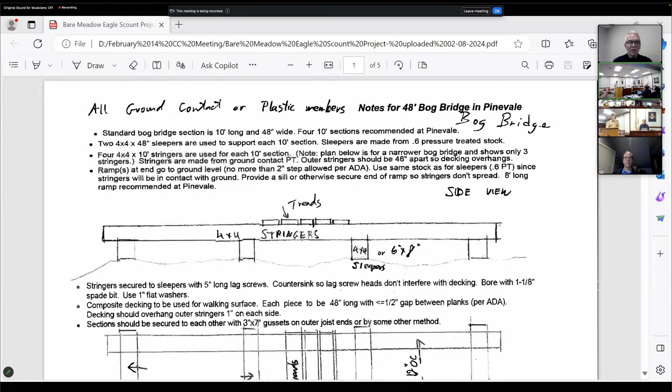I believe that you said that this is a continuation of somebody else's boardwalk, so we're gonna have to get all the sections in that area replaced by this time? So I wouldn't call it a continuation, it is a completely separate bridge. However, it is in the same area and the same process it's gonna be built with.

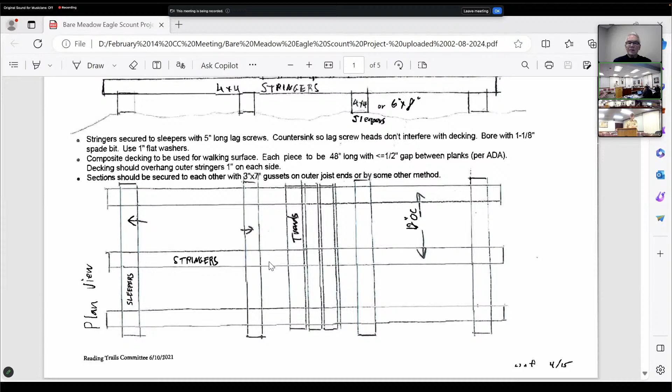If you want to pull up this paper - this is basically what my bridge design is gonna be, you'll see it up there. It's gonna be built out of 4x4 sleepers and 4x4 stringers, and then we'll have the required treads for stepping. And if you want to take a look at the 7-foot section, and the picture of the bog, if you want to pull up the long one.

You'll see in the middle there, that there's a healthy living bog right there. So how I'm gonna work around that is by putting in a separate 7-foot section that will have one end of the sleeper removed, that'll allow the wood to lay directly on it. And as you'll see in the picture, there's a large slant where it hits the bog, so that's what we're hoping to minimize by removing one of the sleepers in that section.

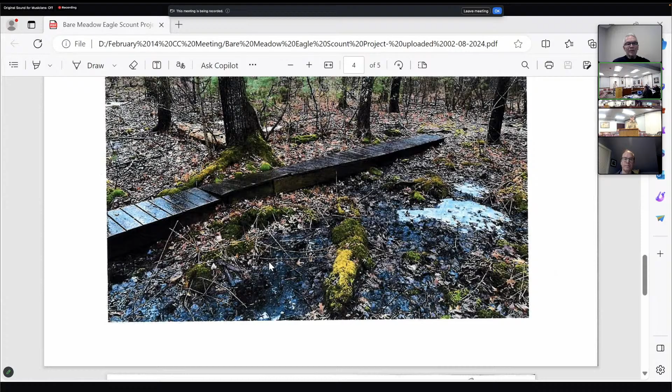So on the screen is basically an outline of what it looks like. You'll see the 10-foot, 7-foot, and 10-foot sections, with 2.5-foot ramps on the ends. That'll make it 32 feet in total.

You'll see my design for the ramp. It's very simple—we're just going to put 2x8s together, making it a 4x8, and then cut it down to the correct angle so we have a nice, not too steep incline going onto the bridge to make it ADA accessible.

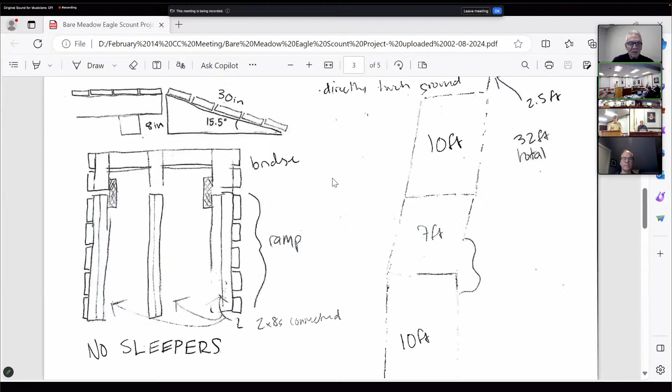Is that it? I'm kind of expecting some questions. Are there members of the commission that have questions for Jack? Hi, Jack.

My first question is, how long do you expect this build to take? This build is really going to be done over two separate days. There'll be a short day of cutting the wood to the correct length.

I'm basically going to be buying a bunch of 10-foot 4x4s and 8-foot 4x4s, with some exceptions for the ramps. That'll all be cut on its own at a Scout Dad's shop or someone's driveway, depending on if we have the right tools. Then all the assembly will be done in the forest. It shouldn't take too long—it's a lot of simple stuff, lining it up and drilling it in.

Are you going to leave the materials there before you build it? Well, I'm probably going to store it at my house or something. So it's not going to be at the site? No, nothing's going to be at the site. Nothing's going to be in the forest until the day we build, when we'll transport it all in.

And what are you going to do with the material you're taking out? The bridge that's there is going to be ripped out, carried out, and disposed of in a dumpster we have access to through one of the Scout Dads. None of that wood will be reused—it's really old, rotted, slippery, and pretty much just very unsafe.

And I'll say, not on you, because on previous projects the material isn't always carried out immediately. So I'd like you to make sure that happens. Yeah, it will.

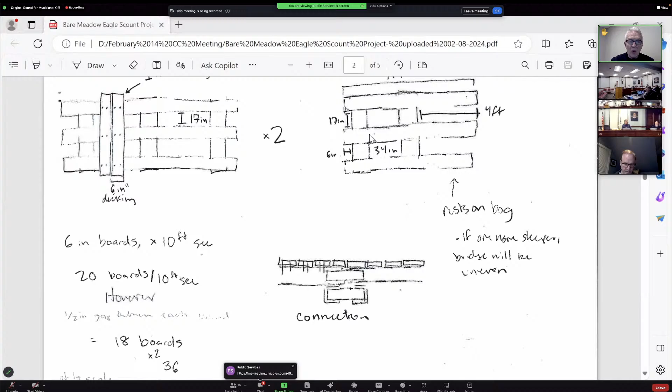Anybody else? Walter has his hand up. Yes, thank you for the presentation. Can we go to the picture which shows the little ramp going up to the work you're going to do? Yes, okay.

Mechanically speaking, you're tapering that ramp off to zero on the right-hand side, which is going to weaken it. Unless that's the standard procedure for bridges in Reading, may I recommend that last right-hand piece not be installed—instead have it cut, so you end up with a trapezoid instead of a triangle.

Does that make sense? Yeah, I understand. All these drawings—this is a very basic proposal outline. I've yet to get the exact science of the measurements and everything like that, but this is my general idea. We're thinking about just burying one end instead of having a ramp, because it could make it easier and cause a lot less trouble than building a ramp.

It'll of course take into consideration the 2 inches that's needed per ADA. But everything you see here is very general—these are the first measurements I came up with.

Jack, let me say thank you on behalf of people in Reading for doing your volunteer work, and I hope you keep that up for the rest of your life. On a personal note, next month will mark my 60th year of being an Eagle, and it's really come in very beneficial all my life. So good luck to you. Thank you very much, I appreciate that a lot.

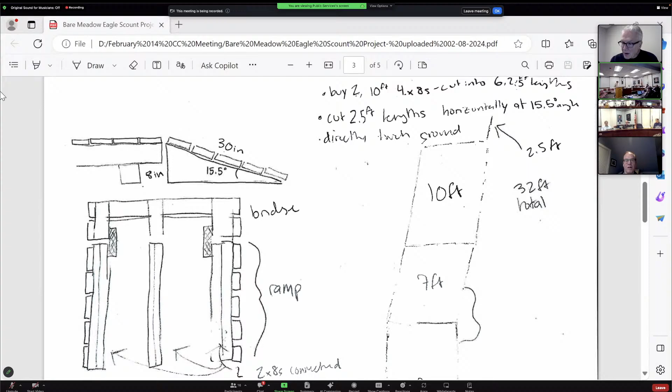So when do you plan on removing the old one, before or after? I'm asking because I think if you leave it there, you can move it off to the side, you might be able to use that to stand on so you're not stepping on the bog.

Well, so it's like a staging area and the building thing, you could use that to stage your materials, lay them on top, stand on it if you need to. And then once you finish the project, remove the old ramp after you're done, would be my suggestion. Okay, yeah, you have to see how it makes sense for you. My answer to you would be, what would you recommend?

Yeah, definitely, I don't know how the other commissioners think about it, but I will execute that.

My question was just, which trail are you gonna take to get into the forest? Where are you gonna be bringing your truck with your lumber in it? It'll be the Wood End Cemetery, there's the drive around out back, that's where all the cars will be that we need, and then we'll just carry it down the hill.

I understand there's a slippery slope there. As a troop, we do have a wagon, so we could use it to bring stuff into the forest as we need, but it really depends. I presume you will leave the wagon on dry ground and not drag it through the mud.

That's what the old bridge could be used for. We'll take part of the section and station the wagon there and work out of that, or we can leave it on the dry trail that's there.

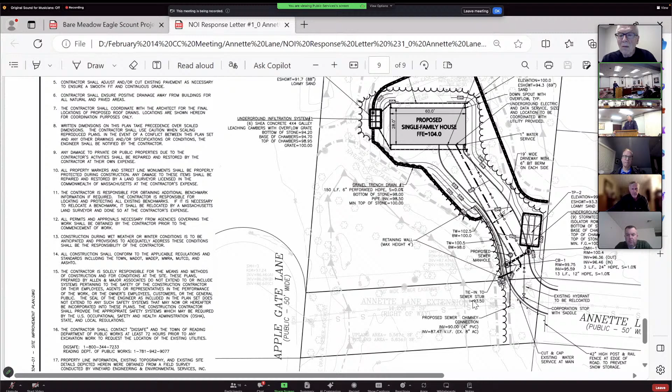And sorry to make you jump around, Chuck, but if you go back up to our proposed site plan. Just let me know if that's right. One more up, please. Thank you.

We added a 42-inch high post and rail fence at the end of the existing pavement of Annette Lane, and had it wrap up along the edge of the driveway. This was to prevent snow from being pushed towards the wetland when the road or driveway is plowed.

In association with that, we removed the proposed snow storage and pre-treatment areas that we had previously shown at the end of the 30-foot roadway extension.

We extended the boardwalk to meet the existing pavement at Annette Lane and at Apple Gate Lane. So the boardwalk is now 200 feet long, but it's important to note that it's the same distance within the wetland, which was 92.4 feet.

We had played around with moving the boardwalk further south to try and get it to match up with the end of the existing sidewalk on the southern side of Annette Lane. But if we were to do that, it would require removal of 6 trees, including a large oak near the corner with 10 Annette Lane. The boardwalk as we're proposing it only requires removal of 2 trees to construct it.

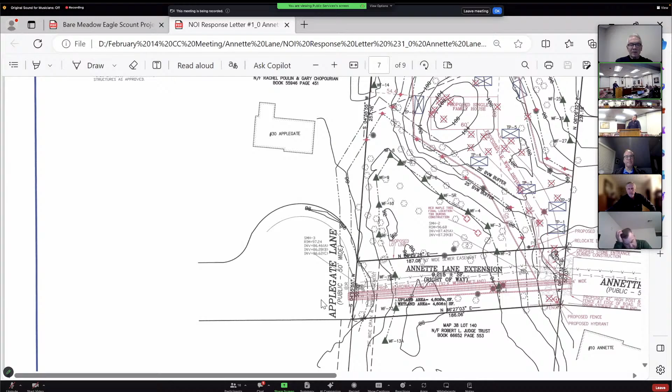We placed red X's over the trees proposed to be removed. With this new driveway and road configuration, we reduced the number of trees to be removed from 32 down to 26. We also submitted a proposed planting plan.

Chuck, if you want to go down one, if we have a moment. So we submitted a proposed planting plan, and this plan outlines locations, types, and number of proposed trees and shrubs that can be planted to make up for these trees that need to be removed.

As we mentioned in a previous meeting, the applicant is open to making a donation to the Conservation Commission Fund in lieu of replanting some or all of the trees, if the commission is acceptable to that. And finally, Lucas Environmental also prepared a letter discussing how this project meets the applicable performance standards in the Wetlands Protection Act and the Reading bylaws.

Lucas Environmental also submitted a request for a variance for construction of the boardwalk within the 25-foot no-disturb zone and within the wetland, and also a variance for construction of a portion of the retaining wall and driveway within the 35-foot no-structure setback. With that, I'd like to turn it over to Joe Orzel of Lucas Environmental to discuss those items in more depth.

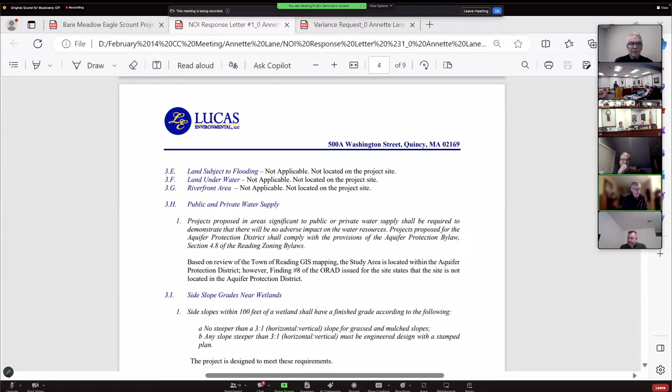As far as wildlife habitat, as stated in the regulations, the town accepts and adopts the current requirements and performance standards under the Wetlands Protection Act. Under the Wetlands Protection Act, the buffer zone itself, wildlife habitat is not within the buffer zone itself, is not protected. Again, it's wildlife habitat within the resource area that is protected.

That said, we are proposing replanting vegetation within the 25-foot no disturb zone according to the Reading planting replacement schedule. The site plan that shows the plantings has them located in 3 general areas. And these are based on a site inspection that I conducted to try and evaluate where the existing shrub layer could accommodate additional plantings where it wasn't too dense, and also where the tree canopy was not extremely dense.

The species that are proposed are primarily shade tolerant, so even with the shady conditions, they should be able to survive. And they are also other species which are already present on site for the most part.

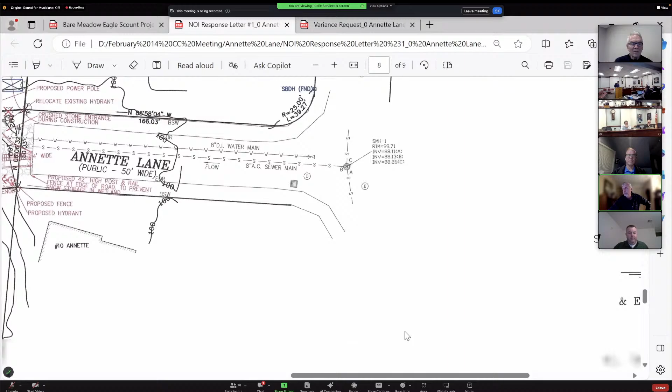The planting plan that was proposed included 16 trees. Let's see my notes here, hold on a second please. 16 trees, including 1 white pine, 5 red oak, 5 yellow birch, 3 American hop hornbeam, and 2 red maple.

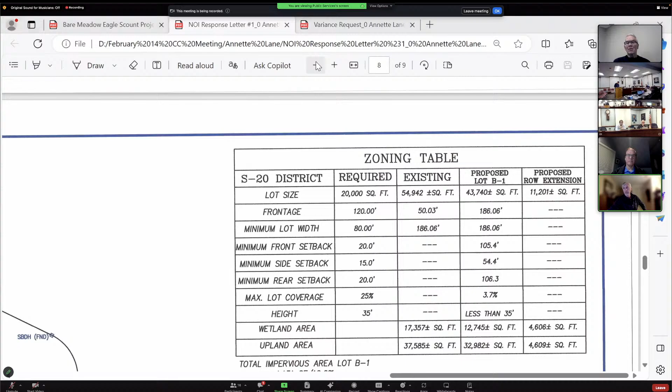10 small trees, large shrubs, those being shad bush. And then we had proposed 33 shrubs split up between witch hazel, sweet pepper bush, and maple leaf viburnums.

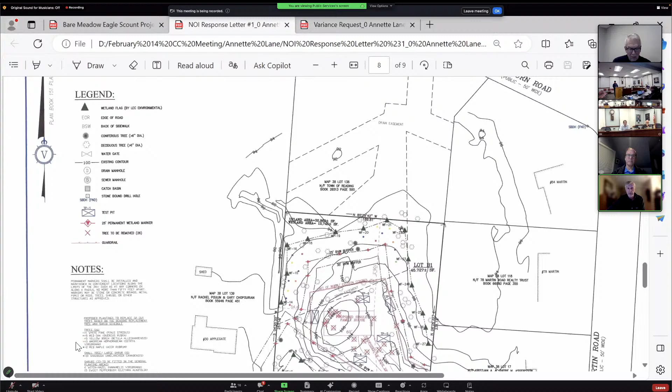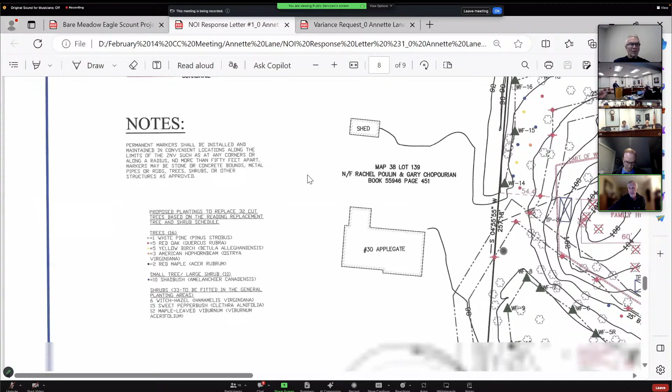As Andrew had noted, the actual tree count, trees being cut, was subsequently reduced from 32 to 26, which would allow the number of shrubs to be reduced by about 15 shrubs to meet the tree replacement schedule, but at this point we're not proposing any changes to the planting plan. And if the commission agrees to this plan, there'd be an overplanting above and beyond what would be required under the tree replacement schedule.

We did also submit the variance request, and I think Andrew kind of touched on all those items already.

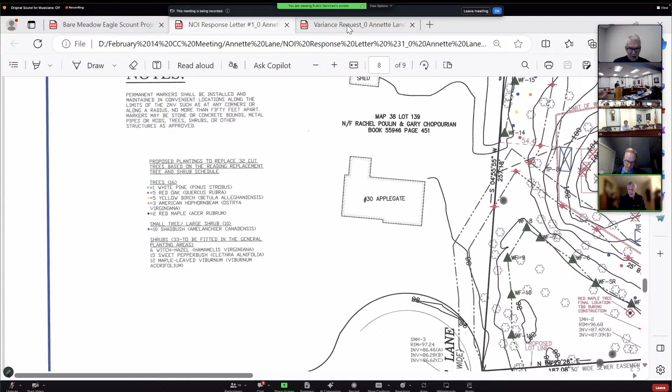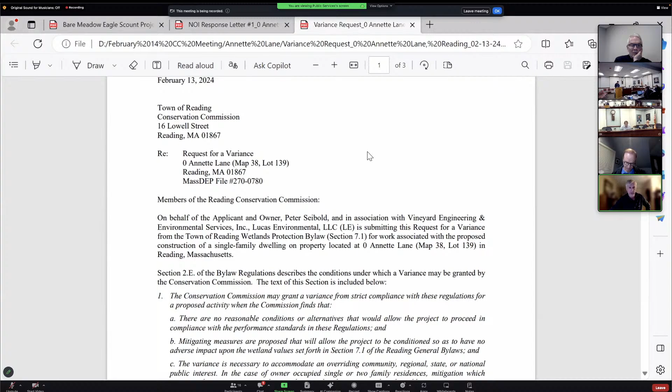As far as why the driveway is required to be slightly within the 35-foot, and why the retaining wall is required to be within the outer edge of the 35-foot zone, I should note that at its closest, the wall is about 31 feet from the wetland, so it's not like a very large intrusion into the 35-foot zone. Also, as an alternative, doing grading in that area instead of a wall would require grading down into the 25-foot no disturb zone, which would be more of an impact.

So I think we meet the requirements for the variance on those items, and I also believe that we meet all the performance standards under the bylaw regulations for work within the buffer zone. Now, if the commission has any specific questions, I'd be happy to address those.

Any members of the commission? Bill?

Yes, there appears to be, unless I'm misreading it, a misprint on page 2 based on what you just said. Page 2, excuse me, second to last paragraph, it says retaining wall is located... Oh, I see now. Got it. That's fine, I now see this text is consistent with what you just said.

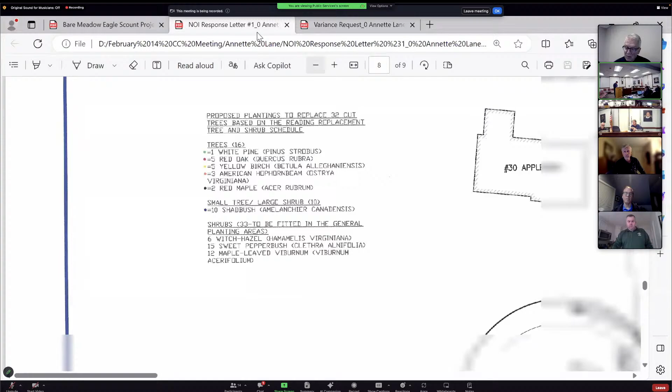My next question was, I don't see any sort of diagram on the plans I'm looking at today that shows how you're going to protect the construction entrance from bringing mud from the hillside out onto Annette Lane. I presume you're coming and going up and down what will eventually be the driveway.

Yep, so we have shown on our site plan a crushed stone entrance during construction. Good, okay. It's kind of faint, a little hard to see, but it basically goes at the end of Annette Lane, the end of the pavement of that lane, and will extend up into the driveway. On the same plan that has the plants on it?

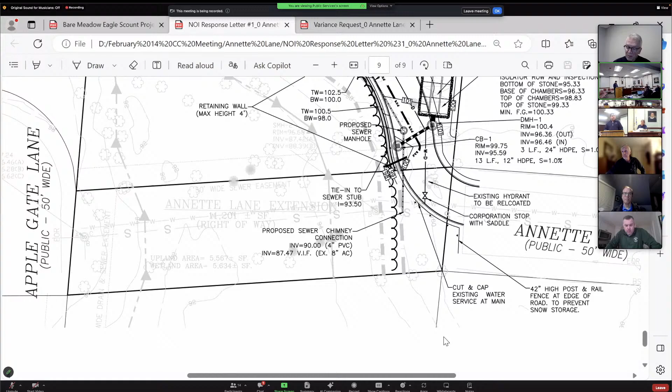No, on the site plan, the plan before that. Maybe I only have these two and not that one. Okay, but as long as you've got it, go up to the first plan in the set, Chuck.

Is that crushed stone permanent or temporary? No, it'll be removed after construction. The red note right above Annette Lane, and then it's hard to see, but there's some faint text up to the left, on your right, Chuck. Yeah, it says crushed stone entrance during construction.

I see that here, and then in gray we have something that looks like a hatch. Okay, oh yeah, and this can be extended a little bit into the driveway. But yeah, this will be crushed stone during construction, removed following construction.

And after you remove the crushed stone, will you put down topsoil again? Yeah, part of it will be driveway, so this is going to be driveway here. And then this was kind of when we had the 30-foot roadway extension, so probably wouldn't need to extend out this far. But in this general vicinity, most of it will be driveway, and we'll replace whatever we have to with topsoil.

Is there a detail on the construction entrance so we know how deep it will be placed? Is it 12 inches, 16 inches? Provide one - do you have a general standard detail that you guys use or like to see?

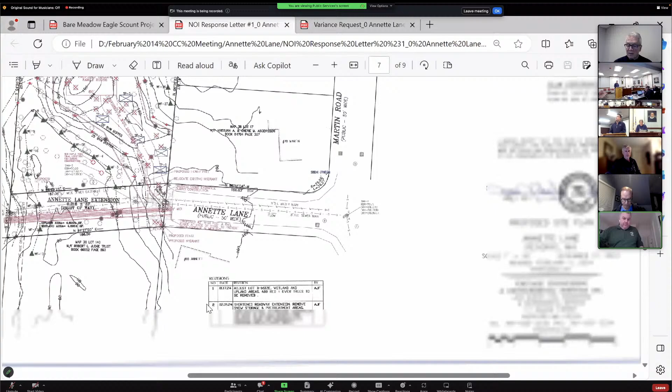I am going to defer to Carlton Quinn, with Civil Engineering, who's on the call to answer that question. So Carlton, my question about that really is, I know there are a lot of boulders up there at the top of that hill - how are you going to manage them? Are you bringing in large construction vehicles to deal with those boulders?

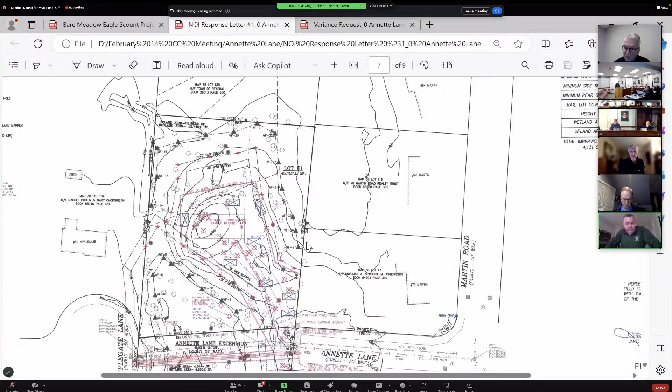Yeah, we would generally handle it with larger construction equipment. If there was something we couldn't handle, we'd have to hammer it down into smaller pieces so we could excavate and remove it. Generally that would be a pneumatic hammer that attaches to the arm of an excavator that would be there to excavate for the foundation anyway. So it would really just be swapping the bucket out for a pneumatic hammer - it wouldn't likely be an extra piece of equipment, just the equipment we already have on site. Okay, all right.

And I did get an email from one of the neighbors talking about the boardwalk, and there are people who said they don't really think they need to build it. So I went and walked that path between the end of Colburn and the end of Deborah, and I also looked at it on the GIS. The neighbor to the north of this property is actually the town of Reading, and we own part of that path that comes in from Colburn, but it's private property on the far end. So even though the neighbors on the Deborah Drive end have landscaped very nicely to guide people to the part of their yard they're willing to have people walk on, that is not a protected right-of-way in any way.

So I do think it will be a public benefit to have a public right-of-way in the form of the boardwalk. It's not a protected passageway further up, and the two neighbors on either side could easily put up tall chain link fences, and therefore there would no longer be a path up there. So I would propose that we keep the boardwalk in the plan.

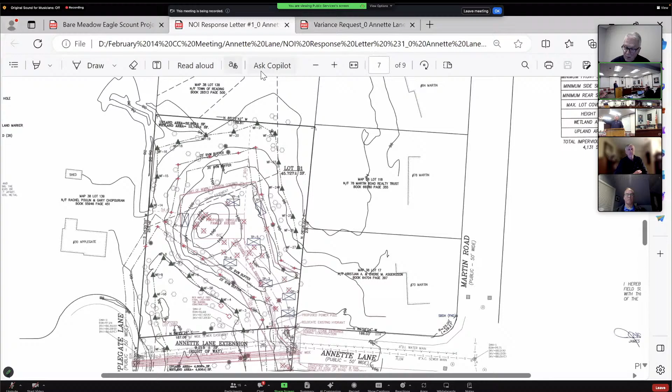Well, the trees that have the red X on them are located by instrument survey, so that's where they are. And then in consultation with Lucas Environmental, that's how we came up with the locations for the proposed planting plants and the species that would go in those locations. Lucas has done a couple site walks out there, so it's more than an educated guess as to where they would go. It's not like we just threw dots on a plan.

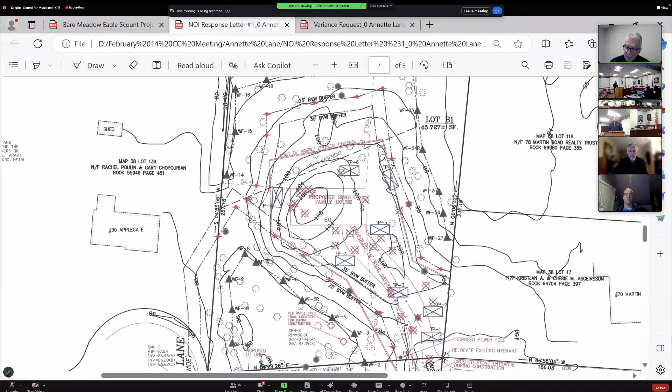Yeah, so I just want to see it. I want to be able to walk the site and see, okay, this is where the tree's going to go. But you're saying I could do that with the plan? Yeah, you can scale it off. Through the chair, yes, go ahead.

And as was mentioned, the plant isn't necessarily going to go exactly where the dot is. They're approximate areas as far as the general locations that are suitable for planting, and they're spaced appropriately on the planting plan. But when you're out in the field, you could certainly meet with Chuck, or the landscaper could meet with Chuck to locate the best location for each of those plants within those areas.

I guess I'm asking because I'm worried that it's nice on paper, but when you get there, it's not really reasonable. Well, it is reasonable. I've been out to the site and I looked for areas where plantings could be done. And there are locations out there where I wouldn't recommend putting any plants in, but these general areas have minimal shrub cover, and the tree canopy is fairly open. So they're amenable to doing some plantings.

I would love to walk with you at the site to see where you plan on putting the trees. So do you want to be in on it, like when I said have Chuck go, do you want to also go at that time? This is before we approve. Okay, so you want to walk it now? So I guess that's my request to you. I would love to walk it and get a feel for where these trees are gonna go.

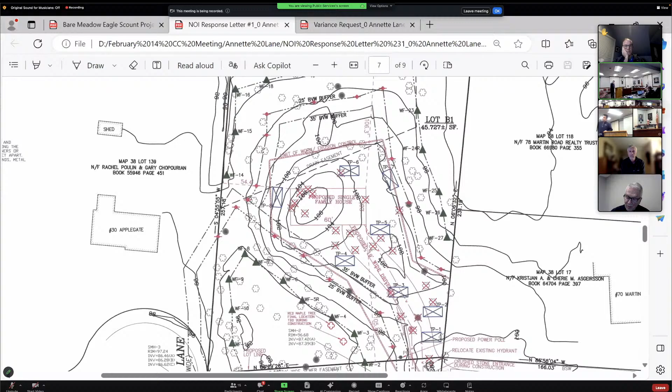My second question is considering this boardwalk. I actually think the boardwalk is a nice gesture, but I do wonder why you haven't considered moving it. You said pushing it south. Yep, which I agree, we don't want to take down more trees. But what about pushing it north, closer to the new house? Yep, if we scroll down.

So if we go north, we're gonna be over the sewer line. There's a sewer manhole here and a sewer manhole here, so the sewer and water utilities run here. We don't want to cover those up in case they ever need to be replaced, if you ever have a water main break or a blockage in the sewer collapses. If we go further north than that, we're gonna have to come down, and we can't block the driveway entrance. So we'd have to come over, then down, and it's a little more convoluted.

We want to keep it in this right of way because this is going to be public property, and this is designed as a public benefit. In addition to that, the grade's a little bit more favorable here, because we get kind of a slope coming down until you get into the wetland area and it flattens out. So really a straight shot down the middle is kind of the best orientation.

With the marking out, can somebody from Zoom explain whether you could understand that, or whether he needed to say it into the mic?

This is Joe. I was able to understand that. Understood. Good, okay. All right.

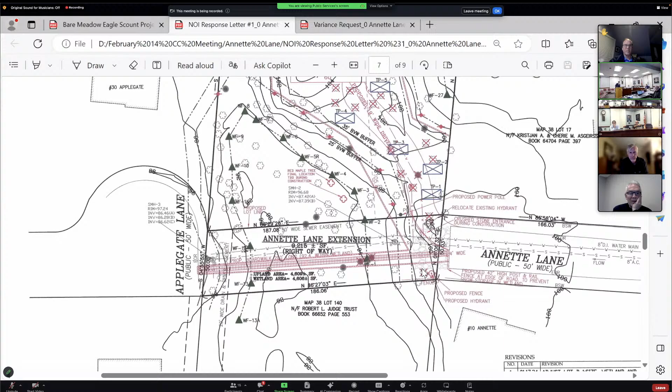So I understand keeping it now where you have it has some logic to it, obviously, but can you get it down to that southern sidewalk? It doesn't have to be this aggressively rectilinear there. You can't even get it around at all? Zoom in. It would just be nice to get it attached to the driveway, to the sidewalk rather.

Yeah, Reading seems to have a problem with connecting sidewalks and walkways. It'd be nice to get it, it's a pedestrian thing is the way I think about it. If you're advocating this as a public benefit, it would make sense to me to try to get it to connect to the sidewalk rather than the street.

And that's the place, you remember, there was that big old oak tree that we talked about in the first meeting about trying to save. That was part of our push for not extending in that lane. Right, it was short, and if you went right over, extended that sidewalk basically, that's compromising that tree, especially the roots. I vaguely remember the tree.

I'd like to think you could design this boardwalk somehow so we can connect without taking down a tree. It seems a little, but I mean, these are things that could be resolved. It's not a particular issue. Hold on.

Could the sidewalk take a sharp turn northwards to meet the boardwalk rather than the boardwalk coming down to meet the sidewalk? Make that kind of connection, I would like to think there, a curve? It's a condition, you need the boardwalk there.

Can that be a gravel path or a mulch path at some point, which makes it easier to save the trees and wind around and connect it? Because I think it's upland in the area we're talking about. So the jog could start on the boardwalk, but then as soon as you could hit some upland, gravel or mulch.

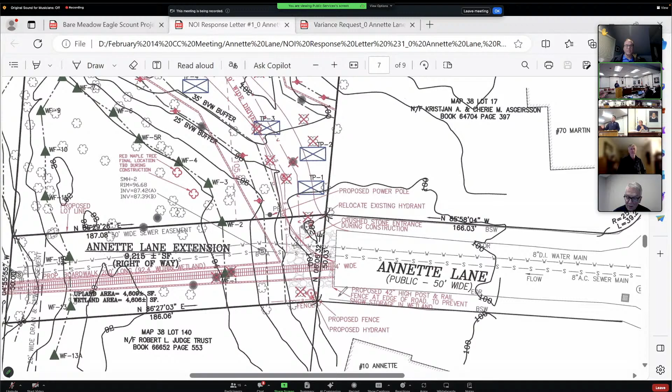Okay, would that be possible for you guys to do it that way? Sure, and now just so I'm clear, are we talking about 25 feet on each side, because that wetland wraps around? So would we be ending it at the 25-foot line on the east end and the 25-foot line on the west end? I think probably going right up to Applegate Lane on the other end, not cutting it off on the west.

Okay, that would be my suggestion, because there's a lot less distance between the wetland line, the 25-foot line, and the street over there. And it meets right up at the edge of the cul-de-sac there. Okay.

Just thinking to winter - I live on a cul-de-sac and I know what happens to the snow at the end of it. It gets piled up and pushed back several feet. If the boardwalk comes up to the edge of the cul-de-sac, it may be at risk for accelerated deterioration from all that snow being pushed onto it, which might damage the end of the boardwalk. Maybe it should be pulled back a little bit and not go right to the end of the cul-de-sac.

Okay, Madam Chair, this is Bill McCants, member. I've had my hand up for a long time. Under state law, this is a hybrid meeting, and I also don't understand why, when we were still getting commissioner comments, you called on a member of the public. So I'm just confused.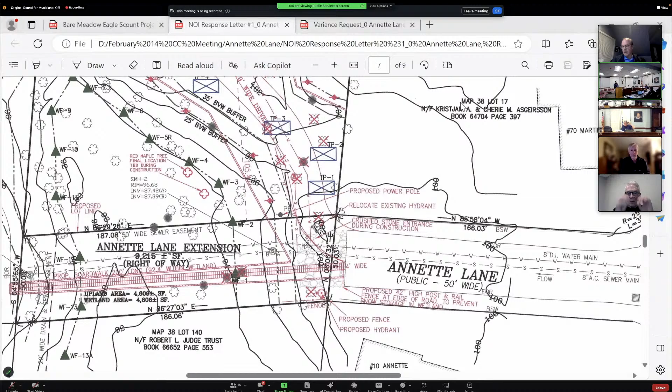All right, and given that it's 8:15 already, we need to make a decision on that before we can move on, and I'd like to get us to move on. Yes. Did I miss public input or anything on this? No. Oh, okay, so you're gonna vote before.

Okay, well, we're discussing this particular path right now. Yeah, but we don't have to design it. I mean, I think that you need to make a decision, or you're going to need to come back for some more input. I mean, it's really been a long time on just a boardwalk.

Okay. And there's a lot of things you can do, including having some discussions out in the field. What works best. I don't know if you have to order anything or if that's going to be a problem. Maybe this is another thing that could be reviewed out in the field if needed.

I think the boardwalk goes to basically a dead end, and there's sidewalks on both sides, and it doesn't matter if you come out in the center of the road or the side of the road, there's not going to be a car there. And it may prevent a car from parking there. And there's a railing or a guardrail there also. So it's been well thought out.

Doesn't mean that a new spot isn't connecting to the path, to the existing sidewalk isn't a good idea. I think we talked about that out in the field. There were some additional trees that had to come down. But this might be a way to kind of get that. But again, there's gonna be other questions coming up about other things, and maybe you want to table this and decide later.

All right, the situation. So then Chuck, do you have more input before we open it to public comment?

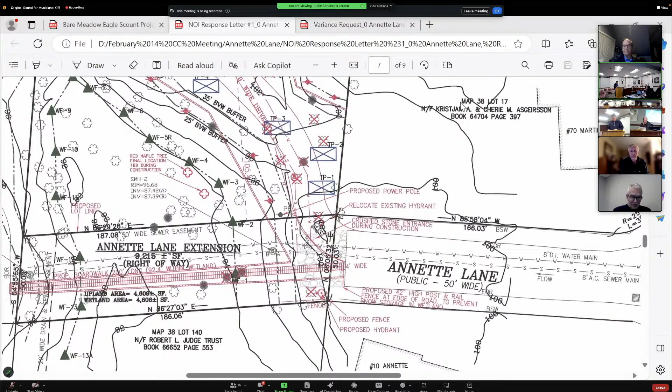Yeah, I was just gonna say, how wide's the boardwalk? Four feet. And for that planting plan, you said you were gonna do some vegetation removal, and I was wondering if you were gonna monitor that for three years, which is typical. Yes. Okay, those are my questions.

So all the commission members who wished to speak have had a chance? I would just suggest that if we are going to continue this, that maybe we postpone public comment until we, as a commission, are done hearing things. Instead of opening public comment tonight, if that's the direction you think this will go. I think there are people who came tonight who wish to speak. I would like to give them a chance to speak before we decide what we're doing next, continue or close.

Okay, are you all set, Andrew? Yeah, I mean, I think that comes down to how the commissioners feel about the planting plan. Okay, all right, so those are questions we will need to address.

Are there people from the general public who wanted to make comments tonight? So raise hand, so you want to just let them know. So if you're watching us tonight on Zoom, if you could just use the raise hand function to raise your hand and we'll get to you. It seems like we're going to start here with people that showed up at town hall, but we'll get to you. Just raise your hands. It's in the reaction button at the bottom of the screen.

Would you please come and stand at the podium and give your name and address?

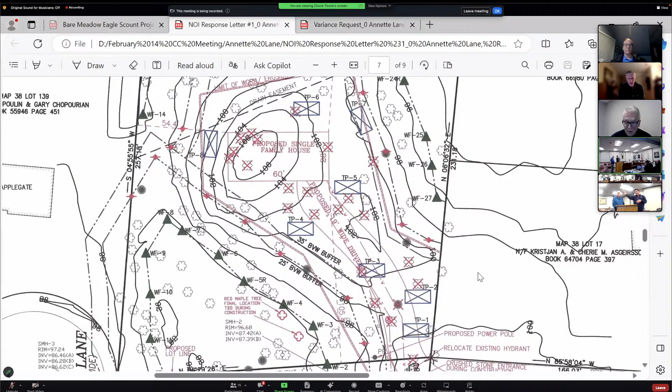If you want to come up and answer his question. Yeah, so it won't be built up as we had proposed before, and any grading that has to happen in that area will be done in such a way that water is kept on our property or within the Annette Lane extension, as it's graded now. The existing grade flows down into the wetland. Any grading we would have to do in that driveway area would be done in such a way, but on the engineering plan, we have two catch basins in the driveway to catch any runoff there.

And I think we went through at length last meeting about the full drainage study done by a Massachusetts professional engineer to the standard of care of the day. It was reviewed by engineers at the Town of Reading Engineering Department and returned with little to no comment. So we feel it's sufficient. We're going to be capturing all water on site and infiltrating into the ground. There's not going to be any more runoff going into that drainage swale or anything like that. And unfortunately, we can't control the frequency at which the DPW cleans out those swales.

So, okay, well then you've changed estimates. Yeah, that sounds good to me.

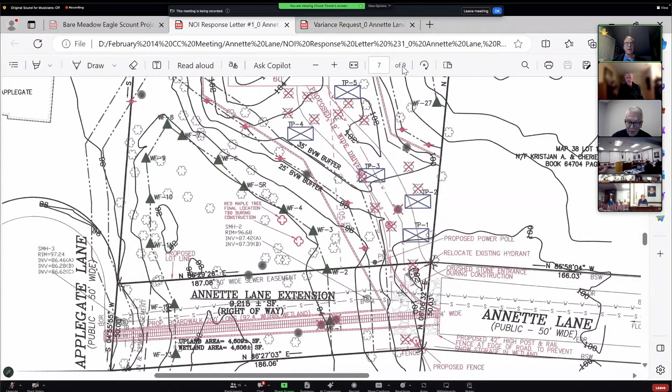I'd just like to respectfully remind the commission in terms of this proposal by the stakeholders that we always have to be mindful of the limits of our jurisdiction under state and local law. Some of the concerns expressed, without discounting the concerns that were expressed, seem to me to fall outside of the commission's jurisdiction. Just wanted to make that comment. Thank you.

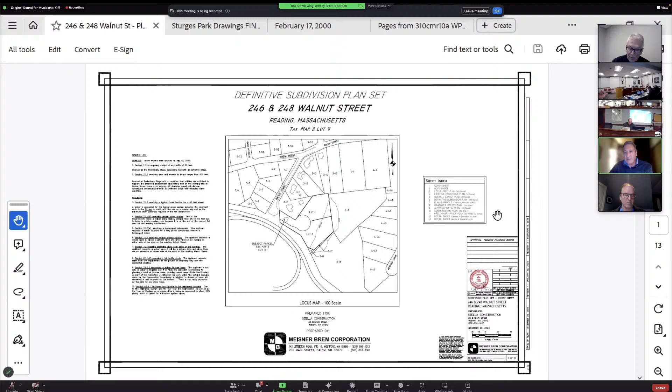Yes, please. So to orient you again, this is the Route 128 exit ramp from 128 to 93 going north. This is the property here, shown as lots 1 and 2 proposed. It's at the end of Walnut Street, off of South Street. I'm going to scroll down now. The next sheet is a bunch of note sheets. This is a locus map again. This is the existing conditions situation. Some of you walked the site. There's a river here, so we have riverfront, we have edge of BVW, and the plan has changed in a few different things.

So the first part is the planning board. We continued the meeting from 2 days ago, the 12th, to the March meeting because they really wanted to hear from you, the Conservation Commission. This is such a delicate property, being next to the riverfront and the wetlands. One of the things they wanted, through the fire department, was a full cul-de-sac, paved cul-de-sac, and a couple parking spaces here. So we had a meeting with Chuck and the planning staff, Andrew and Mary, and we did not want to do this, but it was kind of required by the fire department.

That prompted that change. But as we were talking, you have my letter dated February 8th, and I'm going to go over that in a minute. It looks like this. So I don't know, Madam Chair, do you have copies of all those letters? I think they were online. I didn't print them out. Okay, then I'll go through it a little bit more in detail.

So before we get into this sheet, this is the conservation plan right here. It is very full, as you can see. So I'm going to try to zoom up, and it's a big plan as well, to try to explain some of the issues. I won't reiterate where we're at before, but we have these buffers and setbacks, and we're meeting the town's 35-foot setback, 25-foot setback, and so forth.

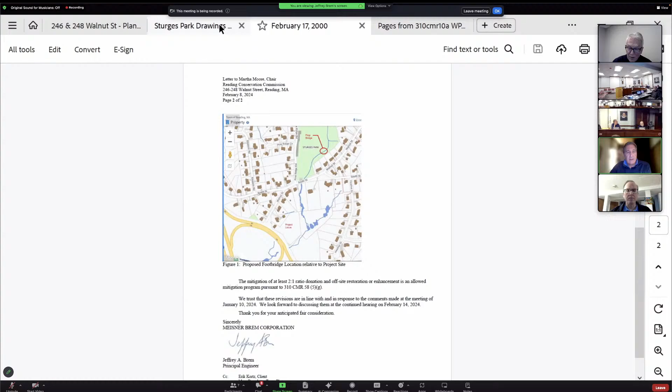Then lastly, Chuck mentioned — and it's actually in my letter — here's the site here, our property next to the highway. Not too far upstream is Sturges Park, and they are doing some work on it. This is from a town plan right here.

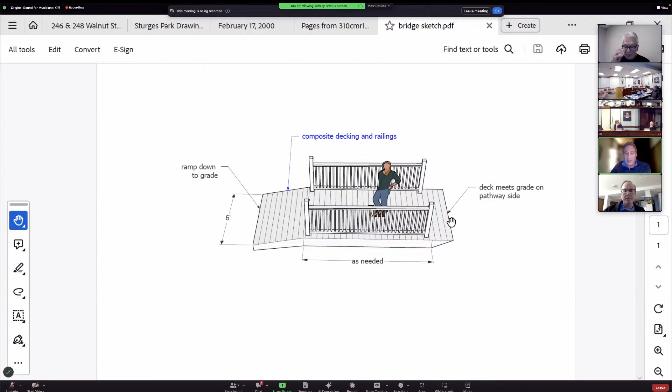And the idea is to cross it with a bridge that my client will pay for — they're framers, builders, pretty easy for them to build a bridge. So I hope you're seeing this bridge — this is his sketch of what he's talking about, a bridge with a ramp up, some railings, and then back down. That would be at some location to be determined between Chuck and some other committee he's talking to — I'll let him talk about it. But that would be done as part of a voluntary condition of this project.

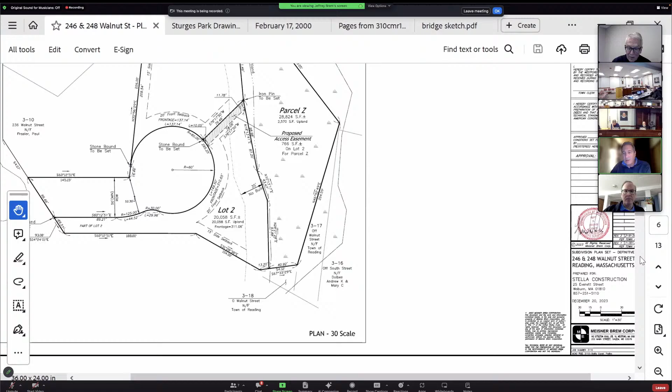So we took your comments at the last meeting to heart and made some significant changes, which we think are good for the project. The only negative, I think, is that we had to pave this whole thing, but it really doesn't affect anything because we're providing such good mitigation now. I tried to do that quickly because I know you're running late on time. Thank you.

I'm curious why they wanted the parking spaces further up the street there.

Chuck, you were there — well, they thought that if somebody... I don't know why they wanted the parking, but I guess this is town-owned property and may have something in the future, so it was easy for us to just provide 2 parking spaces, and that's what they wanted. It's actually outside the one small section of the property that's outside your jurisdiction.

So those parking spaces are for the general public to access the path to get to Parcel Z? Yeah, correct. There's nothing going on with Parcel Z now, so it's more of a future thought.

Nothing's proposed, but putting in the foundation now.

Okay, any members of the commission have questions or comments? Chuck, is there anybody on Zoom with their hands up? No one had, so we'll possibly have a comment from an abutter, but no commission members have their hands up.

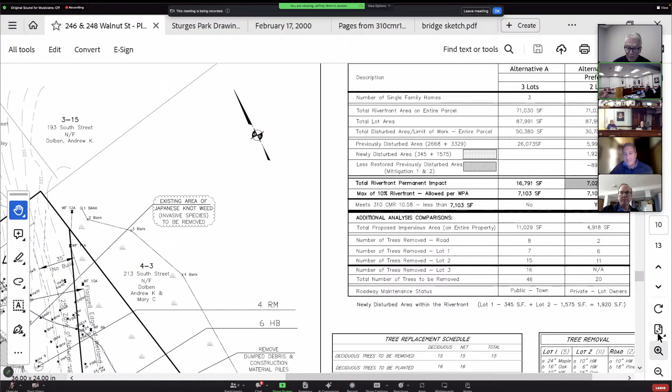So this area right here was previously disturbed, we're not doing anything in it. Okay, I'm clearly not articulating this well enough. So you start out with a certain lot size, and a certain square footage of that lot size has previously been affected. Now you're changing some of your plans for mitigation and what have you, but that original footprint can't change, didn't change, it is what it is, right? Yes, I think we found a couple of mistakes, and that was one of them in our tabulation before.

Sorry, this is Andrew Dolben. Do you have a map showing the area of disturbed land? Just the existing conditions? Yes, let me scroll up. I can't seem to shrink anymore, sometimes I can't get to that lower button. I'm sorry, I can only hit the plus button, I don't know how to get it smaller, so I'm gonna be stuck at this size.

There should be a minus button under the plus button. Yeah, I know. I just can't get to it, oh there it is. Okay, I have to move the zoom bar, it was in the way. Okay, I was able to move the zoom bar.

All right, previously disturbed, the original plan. Right here, this is it here, and this is the existing disturbed line right there. So everything to that line, on this side of it, has been disturbed. And has that line changed from plan to plan?

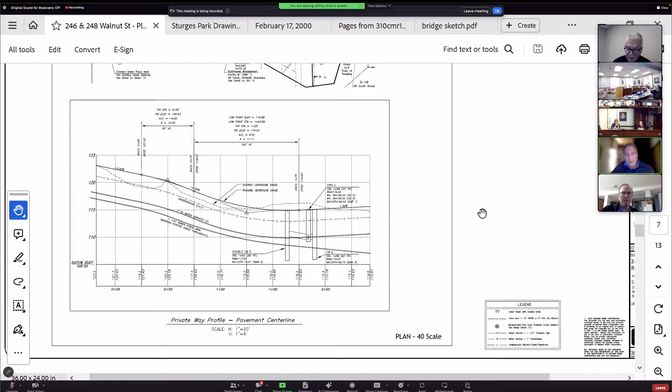So in other words, was the mistake... No, I know what you're asking, I'm trying to figure out why. No, that line is right there, that line did not change. No, it did not. So the line's the same, just the calculation of the area was incorrect? Correct, yeah, the line's exactly the same. There's no question, I didn't change the line.

Okay, without being overly obnoxious, how do we know that mistake was last time and not this time?

Because I could just tell you that I personally went over these calculations this time, which was incredibly difficult, because I realized that I think Mr. Rodolakis was the one that brought it up, that I was using the wrong section of the riverfront and needed to create some mitigation. So I spent a lot more effort calculating all these.

In the interest of time, I'm fine with the plan. I like the other things you've done for parcel Z and the bridge over in Sturges and what have you. I just want you to double check it, so whatever number is in here, you're 1,000% positive it's the right number this time. If it is, then fine. That's the only question I had.

All right, anybody else on the commission with questions? Let me check. No questions, but I would like to recognize the changes that were made.

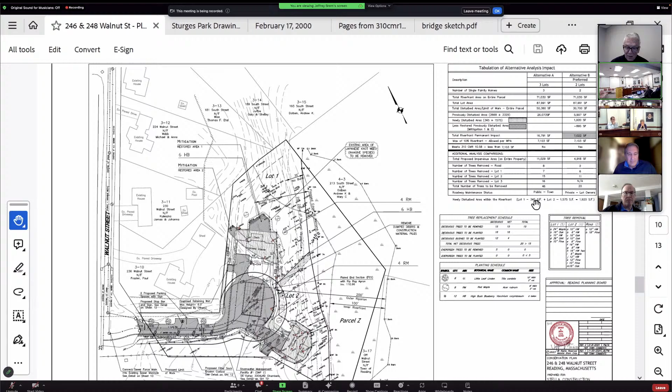My question is, it looks like you've added an infiltration chamber under the cul-de-sac to account for the excess water produced by extra pavement there. Is that correct? Yeah, exactly correct, Madam Chair.

Before, where my hand is right now, that's where it was. It kind of doubled in size, almost doubled, so there was no way it was going to fit here anymore. The test pit that we did is right where my hand is, so we're real close to where the test pit is—it was all sand and gravel. We're putting it under the pavement. We've submitted a request to engineering to make sure this is okay with them, with the calculations. We haven't heard back because this is in the right of way now.

Do you think that'll hold you up? Do you think engineering will ask you to put a test pit inside the chamber area? No, it's very, very close—that part I don't have a problem with. I just got to make sure that it's in the right of way. Now, this is a private road to be privately maintained, so I don't think there's going to be a problem. And we put chambers under pavements all the time.

Okay, and so that chamber got bigger because the pavement got bigger, because of that giant bulge of cul-de-sac down there. Correct—that none of us want. Please talk to the fire department. We don't need that.

Yeah, we see that often, actually. So, the previous plan had a Y-type of turnaround, which is allowed, by the way, if you are talking to them at all or having a group meeting. The Y-type turnaround is allowed in NFPA 1141, that's why we proposed it. But the fire chief, called the authority having jurisdiction, AHJ, makes that determination, period. Okay.

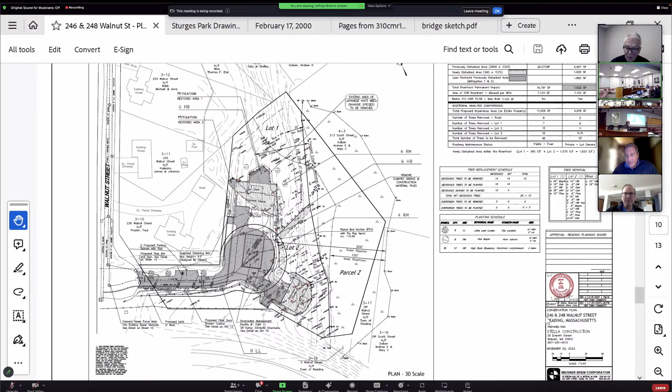I know you don't want to do this, but can you just bring the plan up a bit so we can see it a little bit better? Yeah, I could do it now. There you go, it's an extremely small area, as you can see. Concerned that it was so close to the deck and there's not much yard there, and it's a restored area. It's outside of our 25-foot line, but maybe as a condition we could consider some signage, so people know what that is, to demarcate that line, because that looks to me like it would turn into lawn quickly.

Sure, it's on the side of a hill, so nobody really—I mean, it's about 5 feet of contours in that little area. Yeah, I guess you could tell if you look closely, but okay, well, that was my concern on that.

And then, is there any area where you've removed the invasive vegetation that won't be covered by house, where we need to put a restriction on it to monitor it for 3 to 5 years to make sure it doesn't come back? Yes, mitigation area number 1. Okay, which is this one right here. Okay, so that's probably going to be another condition. Yep, that's fine.

What are you expecting will be the vegetation on that slope leading up to the neighbor's side yard, where you've got the 5 contour lines crammed together so close? I don't think, right here, this would just be a grass slope, a fescue slope.

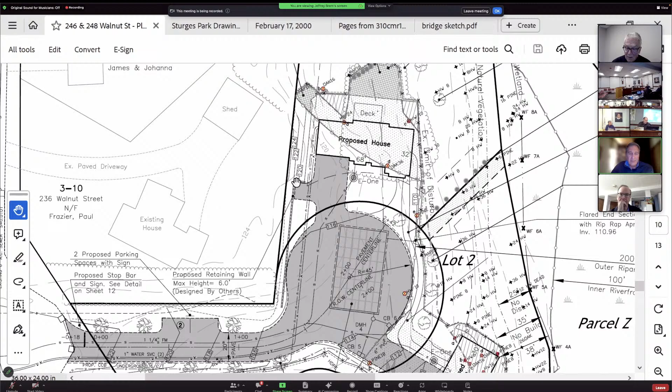We have a wall, as you see down here, we extended the wall so it's along his whole property. We had to do that to make the cul-de-sac work. And then it's the grass in between that turnaround and the cul-de-sac and the wall, there's a little bubble there. Yep.

All right, so Andy, thank you for a lot of these changes. I'm just trying to wrap my head around this cul-de-sac as well. So it sounds like a lot of it's out of our jurisdiction, but are there trees being removed within our jurisdiction because of this cul-de-sac?

This one here was always removed. No, there wasn't — the good news is the cul-de-sac's in an area that was significantly disturbed. Okay, because I think I'm looking at trees and I see about 10 trees being removed by the cul-de-sac. It looks like maybe most of them aren't within our jurisdiction.

I'm looking at — can you zoom in on the picture a little bit more? It's not this one, I think it's the map above this page, or the one that shows all the trees being removed. Ah, yeah, right there.

So where our jurisdiction is, that line that you're on right now, right? Right, exactly, yep. So there are like 8 trees within our jurisdiction that are being taken down because of this cul-de-sac? Or would they have been taken out anyway?

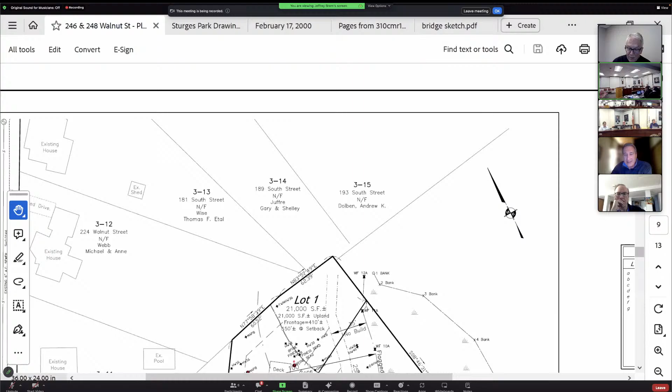They were always taken down on the other plan as well, just the way the loop works, there's not much we have to push back against. All right, fair enough. Sorry about that, I know it's not giving you the ammunition you need. You want to look at this plan right here.

This plan doesn't show the cul-de-sac. So the plan you just looked at was the 3-lot plan, which isn't in the same location anymore. This is the plan that shows the trees, and it's just this one tree right here.

How much of the cul-de-sac has sidewalk on it? None of it. Good. So it's as small an asphalt footprint as we can possibly get. You see the R equals 45 right there? That's the minimum. Yep, okay.

All right, anybody else? Do we have anybody from the general public wanting to make comments? Yeah, this guy, Ken, was on our screen, so it's gonna have to go to me. I asked an abutter to make the comments because I felt he could make them better than myself, but I don't see anyone raising a hand.

So the property owner that owns the abutting land to the south asked me about stormwater, wondering if there was a provision made to prevent the cul-de-sac water from going directly down the driveway of Lot 2.

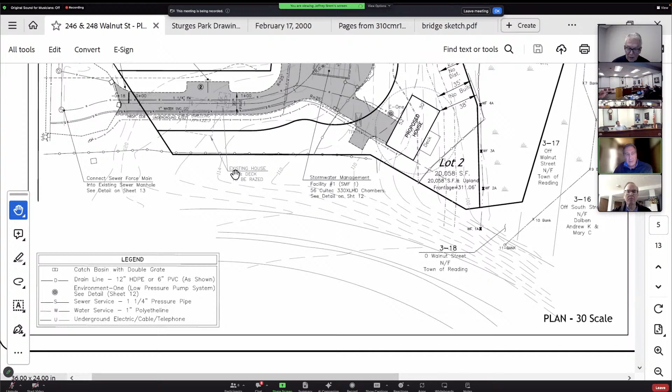The question you had about the construction entrance is a good one. I believe we have that always in our stormwater SWPPP, but I don't see it on this. It probably would be in the street plan, and it's not shown here.

Okay, we could add that as a condition. We do a 50-foot stone construction entrance. That work for you, Chuck? 50 foot? 50 foot, okay.

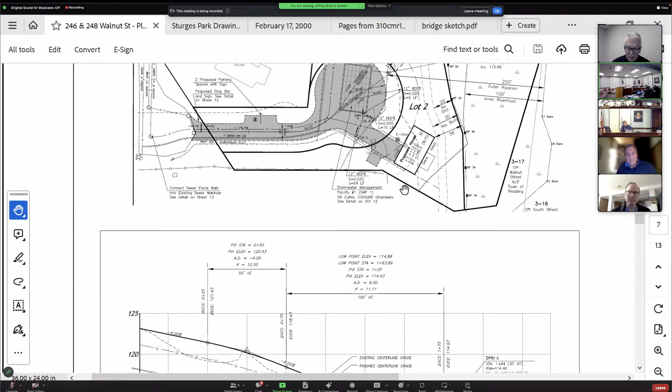Okay, and my last question was, how big are the people in the houses gonna make their lawns, and where are the markers gonna be that show where the edge of the zone of natural vegetation is? Yeah, we've done that before with you. I would like that also to be a condition. We did not show them on the plan, but...

Did he freeze now? Are you asking about the 25-foot line, are you asking for the granite bounds? Yeah, that kind of thing. That's on the order of conditions as a standard boilerplate. Okay, so you're gonna put that in the order of conditions? Yeah, okay, all right.

Did I freeze there for a second? Am I still frozen? You're not frozen, you did freeze. Chuck says he'll put the granite bounds in the order of conditions. Very good. It said I was unstable, not me, the computer, so.

Okay, gonna be some I missed here, so any other conditions? All right, well, you've got all the things he told us about: removing knotweed, planting the trees and blueberries, donating town property, access easement from the cul-de-sac and the bridge in Sturges Park, right?

Those are already in your notes, Chuck? Yeah, but it was just the conditions. Did we cover all those? Street sweeping, maybe? I don't know. Yeah, that's probably needed.

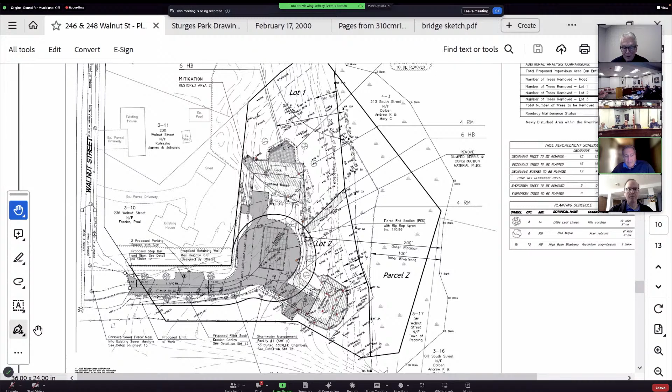No, we do show that, it's just too hard for me to follow. Can you pull that planting plan up and separate it? Oh yeah, the lindens are over there, the red maples - I can make it clear. 1, 2, 3, 4 red maples there. The lindens are over here - 1, 2, 3, 4, 5, 6, 7, I think there's 7, 8 lindens over here. And then the blueberry bushes are right here. I'm not questioning if they're there, it's just hard for me to read. Maybe a separate planting plan.

A little less noise on it. Maybe we'll do it as an exhibit, Chuck, so they could go with the order. They're on this plan, and I know it's easier to read, but you're not asking to relocate them - is that okay if he just sends that in? I can distribute it or put it on the website before the next meeting. I'll have it done on Monday, so that you could close, and I wouldn't issue until that planting plan came in.

Because you're not asking for different species or different locations, it's just that you're having a hard time seeing it. I haven't had a chance to review it properly because it's hard to see. I'd personally like to review the planting plan a bit more - there was a lot that changed, so I didn't focus on the trees. Since we have another meeting on February 28th, we have the luxury of a short discussion about it then. If the other commissioners want to move on, I understand - I think it could be a 15-minute conversation.

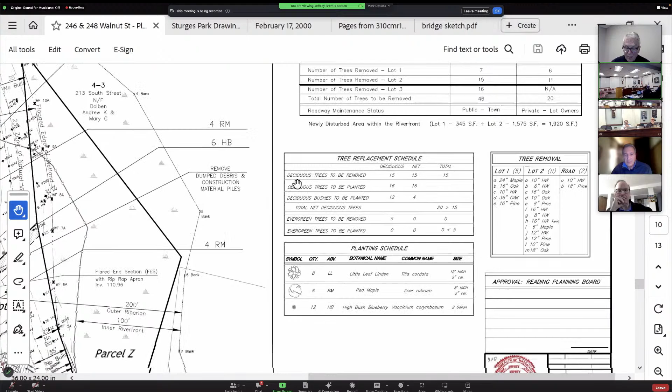The only comment I have on the planting plan is to use the native species of red maple, Acer rubrum, and not the horticultural varieties. If you go to some landscapers or supply stores, you might get a variety like October Flame or Sunset. Try to stick with the native variety. Understood, I'll make sure I do that as well.

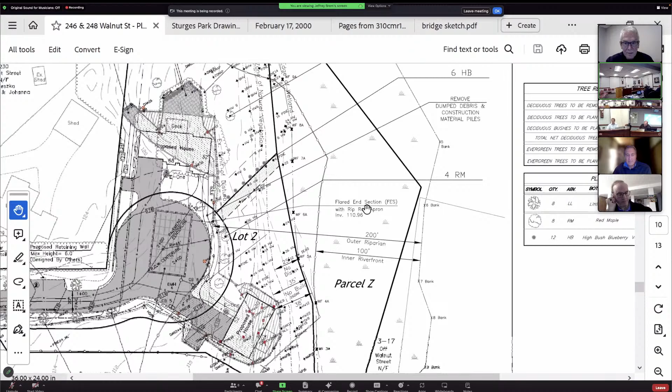So this is what I'm hearing I need: a planting plan that's colorized, a construction entrance detail if you can do that since we're working on the plan, and on that same plan, a note that you'll sweep the street each day. And to check the square footage.

What's our deadline to get back to you with comments that you can address before you leave? I'm leaving on the morning of the 22nd. I have people in my office, so we're at the very end of this, but for me to prep somebody up to go to a meeting would be really difficult. So we need to get our comments back to you before, say, the 20th, so you have a day to deal with them before you leave. That sounds great - you're very accommodating.

Does that work for you? You need to get us whatever we need to see ASAP, so we have time to comment on them by the 20th. Understood.

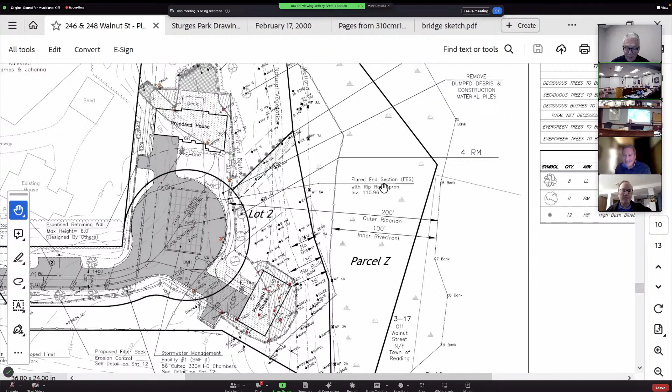I would promise tomorrow, but I know I've got to be in Boston pretty much all day, and Friday Chuck doesn't work, so it'll be Monday. Monday's President's Day - are you here? Oh my God, President's Day. I'm working, but going to see my mom. I'll stop in at the office. Well, aren't the plans all going to come electronically anyway? They are - he's joking. We're just chatting.

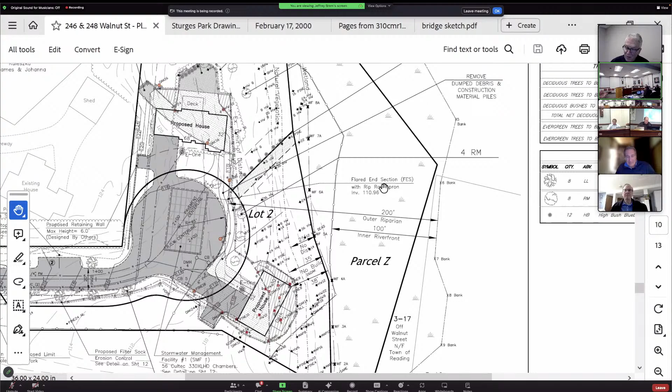Anything on old new business, Chuck, or shall we go on to 51 Cross Street? Yeah, let's go to 51 Cross Street quickly.

The only thing I could do is put up the town website. So I don't know if you guys heard, but Chuck got contacted by the DEP saying

that this person had been filling a pond in his backyard. Chuck, Brian, and I went out to see what was going on in this backyard. It's a very large mowed area with some overgrown, once were pine tree, Christmas tree farm trees, some of which have fallen and some of which have not. Apparently the father-in-law of the owner dug out this pond, and it's not a very big pond, and had been using it for irrigating the Christmas tree farm, as far as I can tell.

We looked at it and it did look like there were some pieces of broken asphalt next to the edge of the water line, and some crumbled debris, stone kind of stuff, but also a lot of pipes from the irrigation, a laundry basket, old pumps, stuff like that, but not evidence that someone was actively filling with a lot of stuff into this pond. There was just this one pile, and I don't know where the pieces of broken asphalt came from, but there was a small pile, maybe the size of a sewer lid.

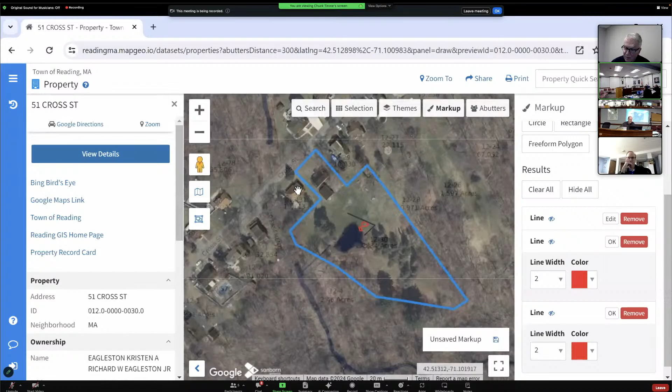It's wide open. The other thing you'll notice is that other properties have created lawn in very wet areas. It was very spongy, very wet in the back, but there are pines right in this area. They're falling over, they probably were planted, they probably weren't just volunteer growth. The rest of it is hardwood. So I would think, back in the day, there was some filling back in this area to create the pond.

So the pond right here, I'm just going to move the highlighted area - the pond right here is on the property. This side of the pond is all the side casting from digging it out. There's a stream that connects that pond to Walker's Brook, which is a tributary to the Saugus River, and it's a perennial stream.

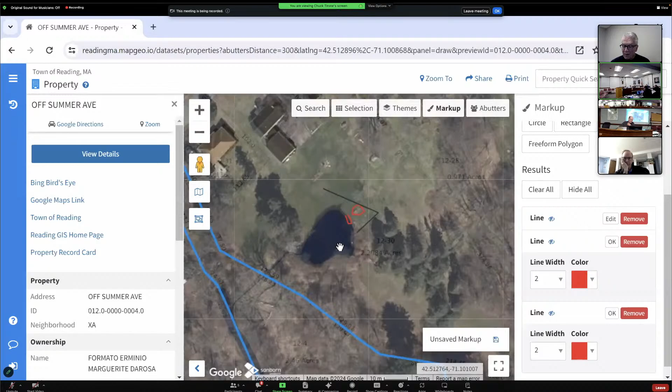Right here, approximately about in this location, there's what looks like tailings from street work, from reclamation projects, that was right in the water - basically chunks of asphalt also in the water, but not a lot. If I had to describe it, I would say 2 to 3 five-gallon buckets from what I saw, but the entire pond is frozen with ice, and that included some chunks of asphalt.

In this area here, there's a pile that stands about 3 foot high that looks like it's been there a while, except for the asphalt, which I can't understand where that came from because the guy's driveway looked in good shape. And there's some CMUs also mixed into that pile, and - what are those things called? Cinder blocks, yeah.

Cinder blocks also, and so we asked for—I know Brian had something—remove the cinder blocks, remove the asphalt. Basically, take down this whole area, take the stuff out of the pond that's in the pond, and do a general cleanup everywhere and clean up the yard waste.

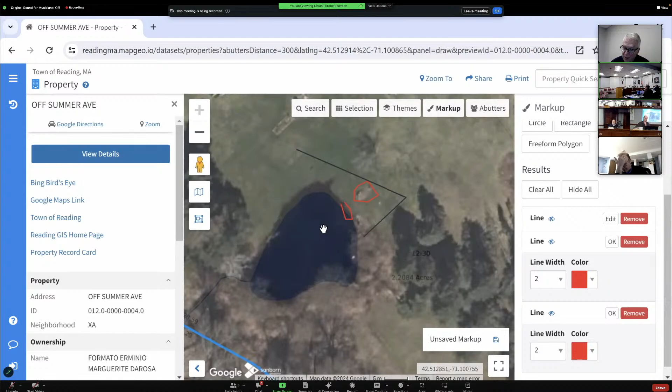In the far backside corner, to the right behind the pond, they've clearly been dumping leaves there for most of my lifetime, so it's very spongy. So essentially we said stop, don't add any more to it. He said it's possible his landscaper does, he didn't know, but he would talk to them. I don't remember if we asked him to actually remove it. Yeah, I don't think we did.

I think we just said stop dumping. But Chuck, after you got off our meeting, plotted 100 feet from the wetland line and figured out there's part of his property where he could put a compost pile, on the dry side more than 100 feet from the wetland line. That's a question he asked when we were there. I'd say certainly not official, and probably generous, because the wetland line is probably off by a whole lot—but based on the aerial photo and where our jurisdiction would go, I drew it out with that. So there's opportunity right around these pine trees.

So the question is—yes, there's some dumping out there, yes there was some debris in the pond right on the edge, we asked them to clean it up. Is this a violation notice? Is this an enforcement order? Or is this just something we want to keep monitoring?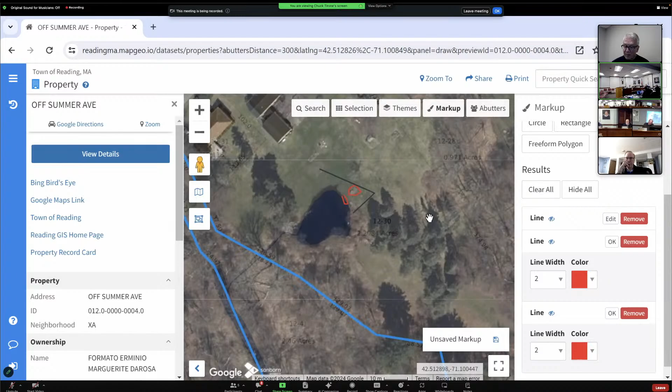Okay, Bill, do you have a thought on this? I have one more thing to say before we do that. We did talk to him about

when to clean it up by, and we're talking about June-ish. Three months from now. I said this year, sorry. What is it, next year to me? Yeah, so of '24.

I think Chuck and Brian had both either stated or implied this—I'm uncomfortable with us coming down hard on someone who's been cooperative, but secondly, when we've got a frozen pond. Interesting that the state pointed this out, but I'd be cautious. So I would endorse Brian's suggestion.

I know, I was saying, why am I getting this call? Anyways, there was something, but it was so minuscule. Like, what do they have, drones now or something?

So, okay, so the violation notice, clean out by June—any other conditions on that violation notice? Don't dump yard waste anymore.

What about the different spot for the compost pile? Do you want to make that official—compost outside the 100-foot buffer as per GIS map? Yeah.